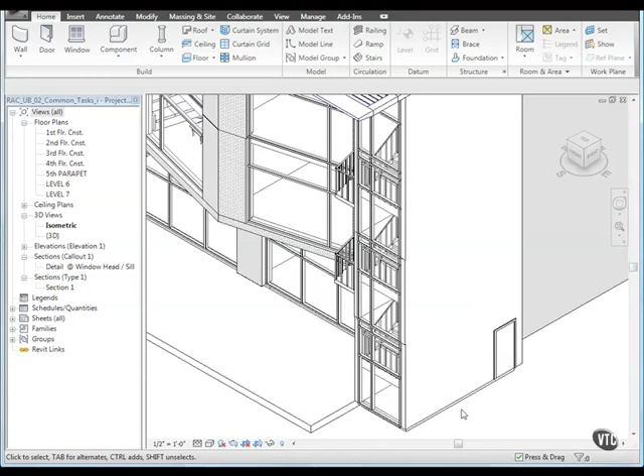If you use a mouse that has a wheel as the middle button, you can roll the wheel forward to zoom in and roll it backwards to zoom out. You can also click and drag the wheel mouse button to pan.

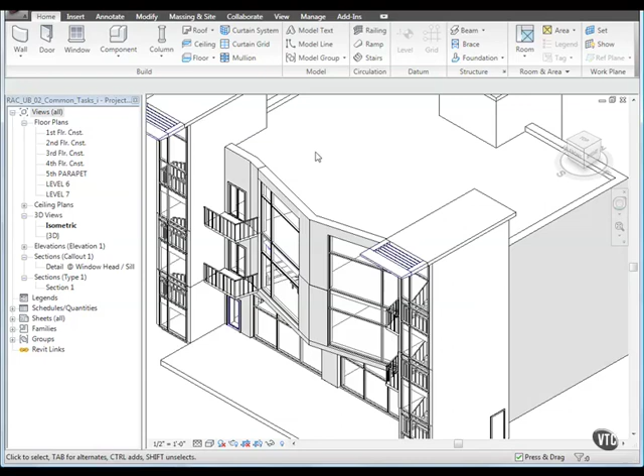Another way to zoom to fit the view in the window is to right-click in the drawing area and select Zoom to Fit.

Next, from the navigation bar, click the steering wheel tool. When you do, the full navigation wheel displays in the drawing area. As you move the mouse, the wheel follows the cursor around the drawing area.

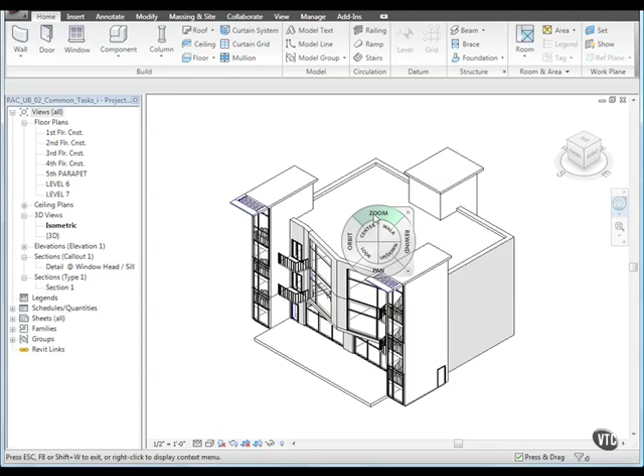Now move the cursor over the zoom wedge of the wheel so that it highlights, then click and hold the mouse button. You'll see that the cursor displays a pivot point for the zoom tool.

Now, if you drag the cursor down or left, the view will zoom out. And if you drag the cursor up or to the right, the view will zoom in.

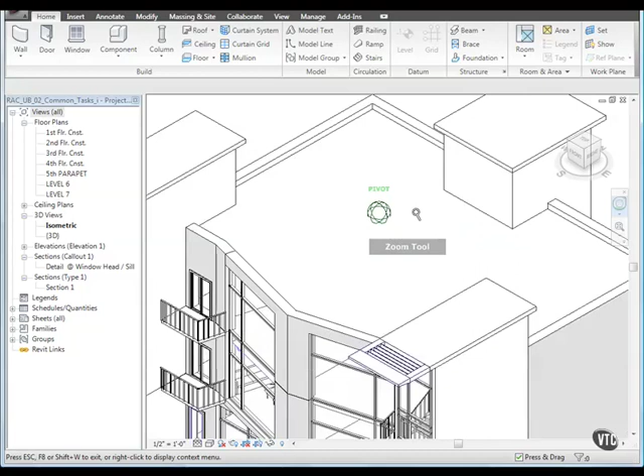You can change the pivot point by releasing the mouse button, moving the wheel to a desired location, and then using the zoom tool again.

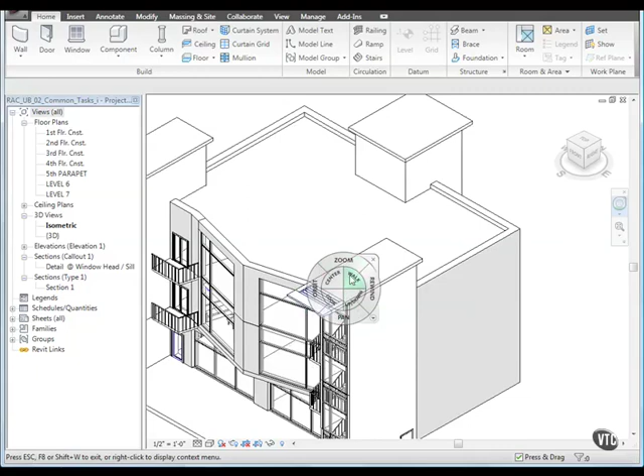To exit the steering wheel, press Escape. Then close the file without saving it, as that concludes this lesson.